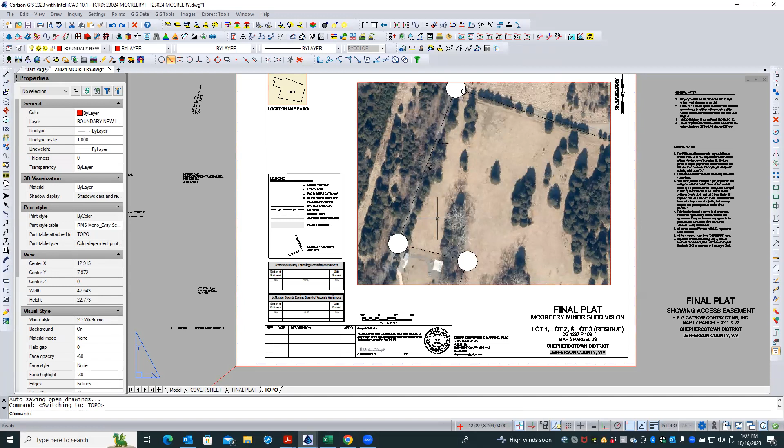Let me go ahead and turn off. Well, let me just for a second. Let me show you. There we go. Okay. This is the highway. I shot both edges of pavement, and I shot the center line, and then it drops off steeply to a bank on this side, and I took a shot along there, and then I came back for a couple hundred feet back here. I picked out a center line.

As you can tell from the rock outcrops, this is extremely rocky. Mm-hmm. And I picked out a center line avoiding rock as much as I could. But once he gets back here and he puts this right of way along this tree row, he's in for it, I'm afraid. Yeah. But in any case, I just wanted to have this photograph on long enough to show you what we're doing here, and then I can turn it off.

All right. Now, one thing to keep in mind, even though you picked out a potential center line and surveyed that, you don't necessarily have to do that, in the sense that if you can develop a continuous surface, then any center line you choose that lies over top of that surface, they'll be able to cut a profile from, as long as you've defined the surface underneath it. So no, I just picked a center line to avoid the rocks.

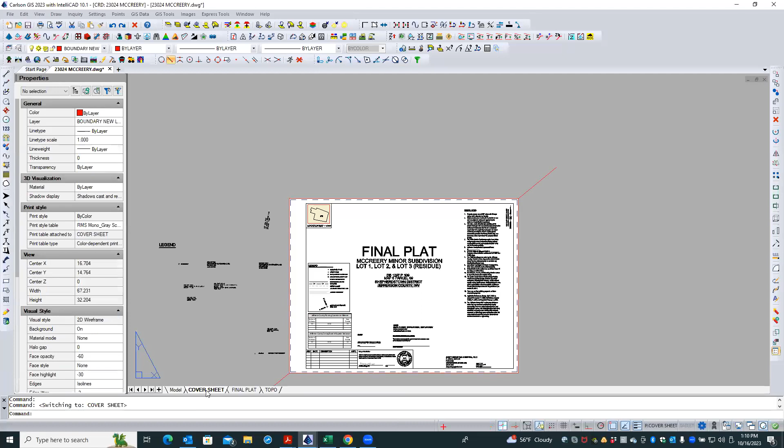Okay. So anyway, this drawing, because of the size, I went through and created a cover sheet, which I have almost complete, and I have a sheet called the final plat of the McCreery minor subdivision, which shows the first 3 lots, and then I have the topo, which will only be submitted to the engineer. He's going to do his own plan and profile to submit to the highway department. Right, okay.

And I picked out a couple of entrance points along here, and in the northerly direction, you can see forever. You can probably see for 1,000 feet, maybe 2,000 feet. Mm-hmm. In this direction, I picked where the sight limit is, and I've got to give him those distances from each one of these. But anyway, what I'd like to do this afternoon is similar to what we did the other day. And I don't know if I did this.

I don't have a scale here. I think I did this at 1 inch to 100 feet, which isn't a particularly good scale for topo. Oh, no, 1 inch to 50. Yeah, okay. And so that's not too bad, but because of the area that we have to do, I couldn't do a 1 to 20, I don't think. Right. Just because it wouldn't necessarily fit.

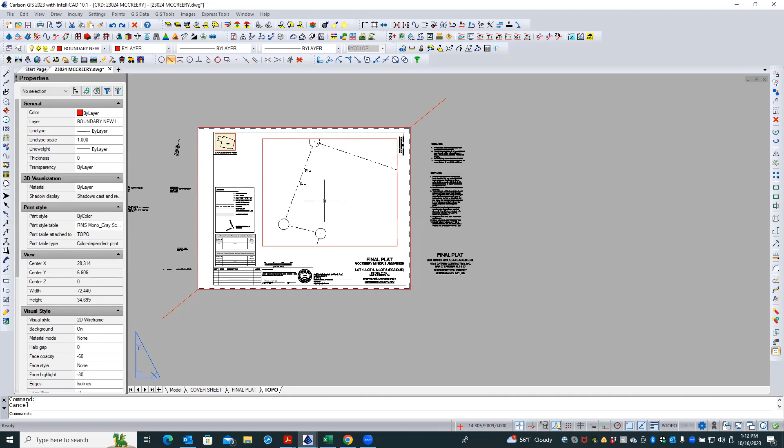And these things are huge, of course, and they don't need to be. I made them big when I did the original drawing to go out in the field and look for stuff so that I could see them. Mm-hmm. And no problem. You can change those at will. So anyway, what I'd like to do today is to generate the topo in here, and then to bring in the topo from the state site and do a comparison.

You can also, Michael, look at your comparison and see how it looks. If it looks good, you can do your topo, which is going to be that little chunk around that entrance geometry there. And then you can merge it into the surrounding LiDAR derived topo that comes from the state.

So you sort of tie in: you've got the detailed part, they'll have the rest of it, and then you can cut profiles across the whole site, across the whole state if you wanted. But at least that way the entrance down there is going to be much better defined than it will be from the flights. And that's what you're trying to deliver.

Okay, now I put all of the topo points on the 300 series. Everything from 300 up to 350 is a point for elevation. All right. So what about your spots? Will those also be? Yes. Okay, because that went up to like 390, I think. I thought I saw the number. Maybe.

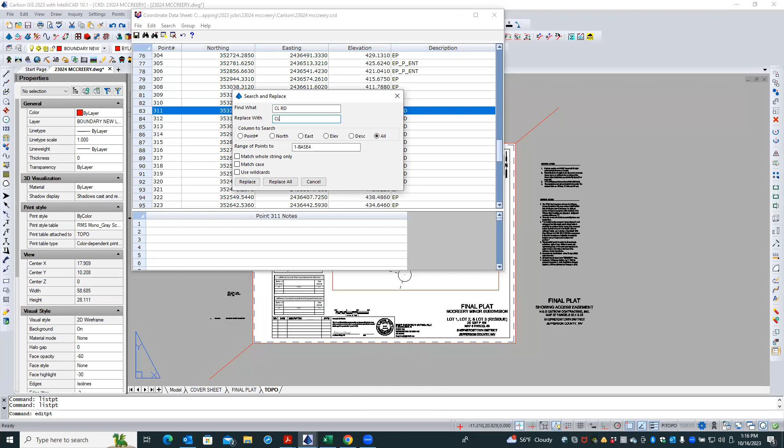Yeah, so go to the edit menu, or it might be under search. You look under search, do a replace. And you want to replace CL space RD, replace with CL. There you go, and replace all. Okay, now let's see what else we've got. Maybe a couple more EPs. There's toe and spot, I think.

All right, so your best entrance is that one. No, that's a 340. It still is an elevation. So yeah, I would just give that an underscore. There we go. And that looks like it. All right, so let's save. Excuse me, we'll exit that.

Now, let's go to your model tab because we don't really need to be over here in the viewport necessarily. Let's just go to the model. Let me double check a couple of variables here. I check these settings to make sure the drawing's at the right setting. Yeah, that's one of the things I was going to check anyway. So go ahead and do that.

All right, so you're at 400. Let's make that 50. Not 500. Oops. There you go. And hit okay. Okay, and now I'm going to look at a variable, MS scale. That is on, that's good. And that's good. Okie doke. All right, so we're ready to start doing our thing.

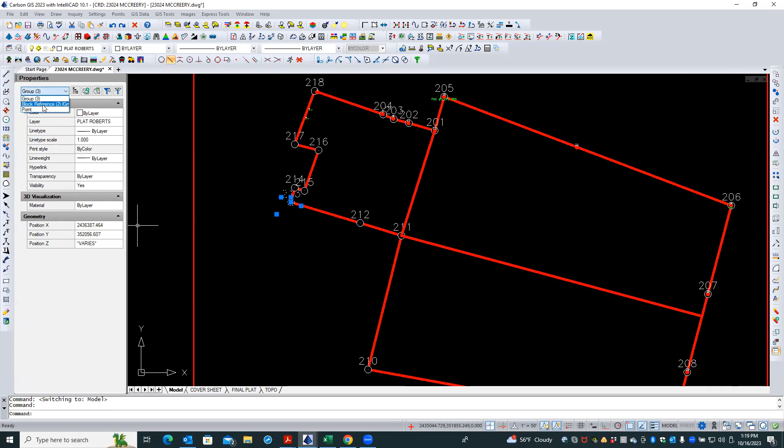Anyway, I don't know. Anyway, there's a command under settings called rescale drawing. And what this is going to do, it's going to ask this. Oh, it does ask the old horizontal scale, so I don't know what it was. Let's say, and I just resized those points so that I could see them. I just did it arbitrarily. Yeah, oh, okay. All right. Well, anyway, I'll let you take care of that if you want.

Are these all on the same layer like Plat Roberts, and Probably. Here's this one, which is on Boundary and Plat Roberts. That's okay. So let's freeze that layer for now, or those two layers. Uh-oh. Didn't want to do that one. I just want that. There we go.

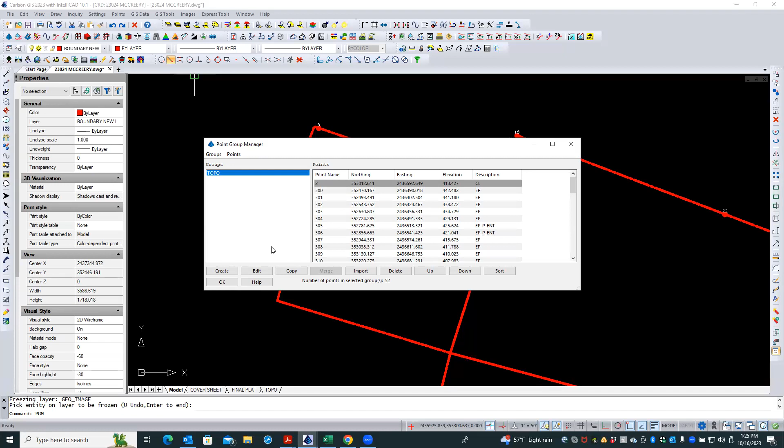It's going to be probably close to another. I was doing that when I started out with the boundary. Okay. But it should be a good elevation anyway. All right. So what we'll do is we'll see, and if it messes up any kind of thing, like you probably shot it before you shot the first center line point that you were picking up. Yes, it won't be in the right line.

Okay, so we're going to find that point and maybe we'll see if we can add it if it helps. If not, we'll exclude it. We'll be able to do that. Okay. So now we've got these points and we don't even really have to draw them. You can if you want to see them, but we can also do them through field to finish. So let's go to the survey module, and then let's go to the survey menu and choose field to finish.

There you go. All right. So it wants to know a field code definition file, which you do not have as yet. So we're going to say new. And we'll leave it here in settings so that we can get to it anytime with any other project if we want. Maybe we'll use it as a starting point for something else later. So it won't hurt. It's not going to go in our local job folder, but it'll be here in settings, and that's okay because we're going to name it McCreery.

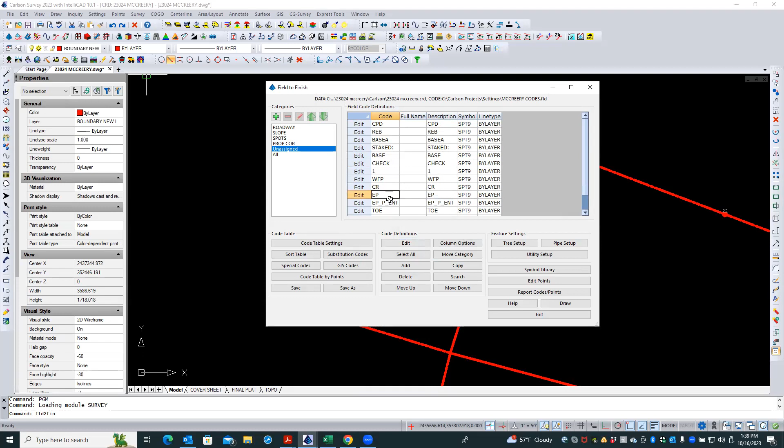All right, so I've got an iron pin, a concrete monument. So I'll now move those to property corner. All right, so we had the center lines. What is, here's some EP that go to roadway. We've got toe that goes to slope. And then we've got

spot, and your best entrance points, are those on the EP, on the edge of pavement? Two of them are, and one of them isn't. One of them's at the toe, I believe. Okay. I think. All right, so I'm gonna just put both of those under spot, I think. And again, this part doesn't really matter much.

Now, anything else in here, these are the ones that are left. See, I'm sitting here under unassigned on the left side. So these are the ones that have not been assigned. Do any of those make sense for any of those other categories? Yeah, the capped rebar. Oh, okay, that was rebar. Wooden fence post.

All right, so let's go up here and get this. Now I'm selecting and dragging with the mouse because I couldn't get the control click to do what I wanted it to. So I'm going to put those on property corner. So now there was one more you said. Wooden fence post, yeah, down at the bottom, those two at the bottom. Both of these. Yeah. Okay.

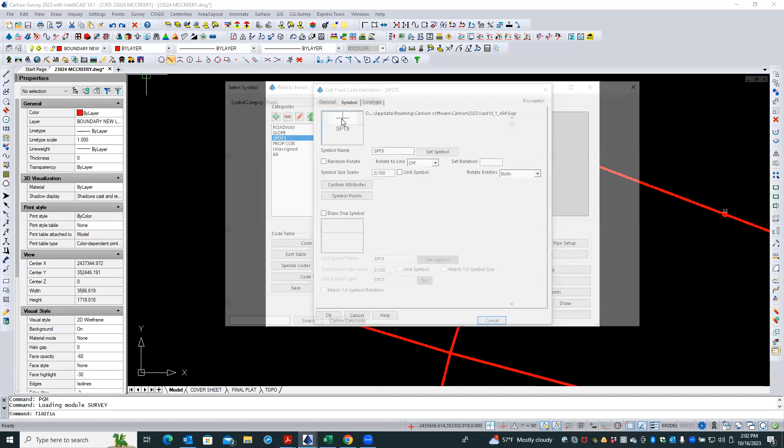And the symbol again will be that X, and you could have it separate. You can do a different one, say for a particular code. And so let's change this attribute to, I think it's that one that gives that little angled up elevation. And let's make that as points only. There. Description, none. I don't want to see the description. I'll just take it as a spot elevation, and we'll say okay.

Best entrance. That was kind of like a spot that's labeled as best entrance. Yeah, and so this would be basically just sort of a random shot. So we'll leave the symbol. We'll leave it to go on its own. Let's put it on V-site-miscellaneous, something like that. All right. And we won't put it on a different point layer. We'll do the points only. We'll do it 2, and we'll make that. And so we'll see what happens with that.

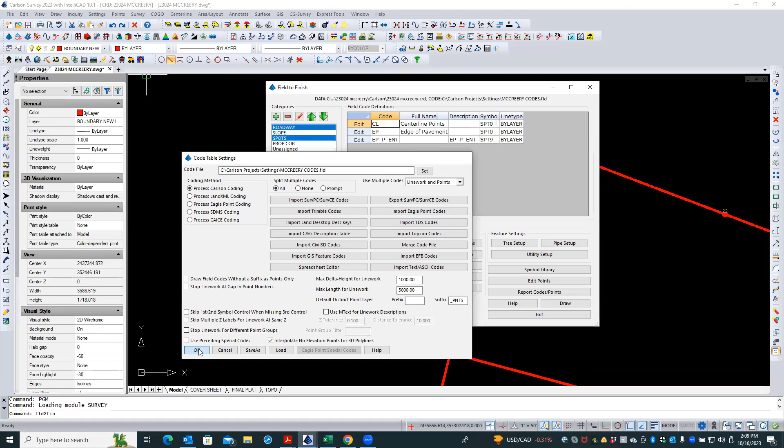All right, so all of these by default we'll leave set to this, and we'll call that okay. And now the last thing I want you to look at is in these code tables, what we call special codes. And these are codes that go after your code.

Like you're going to shoot a point, you're going to call it a CL, and then you're going to put a space, and you're going to put one of these codes in there, once you're used to surveying by field to finish. And so you would say, okay, my CL is the description. So that's going to automatically start doing things like my code says. But within all of these CLs, I can put a space BEG. This is going to begin a new centerline line.

And I may have other CL points, but if I see a CL space BEG, that means stop what you were doing on the old CLs and now start a new centerline line. Same thing with an end. It's a good habit to get into when you first start doing this work that you always identify the first shot in a feature and the last shot, so you know where it starts and stops.

And then there's the PC and PTs. Those are the two most important codes that you're going to see, and that's these next ones down. That's where you start a curve and end a curve. So PC and PT, and they can be anything you want. You could put SC and EC, it doesn't matter. You could put 7 and -7. None of that stuff matters, just as long as you're consistent. But there's a couple you want to be familiar with: begin and end, PC and PT.

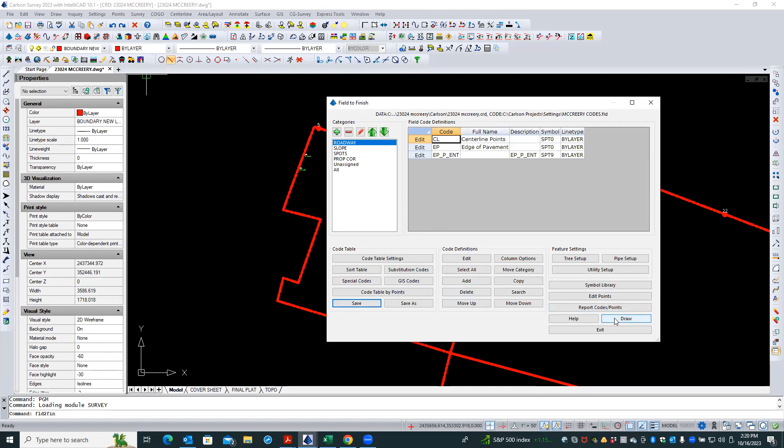Okay. And again, we'll see how that part is going to work. Once we see where the points lie, we're going to get a really good sense of how this is going to work, because this will be a multi-pass thing until we get it resolved and refined. So we're going to say draw, and it's going to come to this. And this is what normally shows up if you have a code already; when you go into this command, this comes up first. You don't go into building a table from your points, etc.

But you see that it already knows what coordinate file, it knows now what code table. If I were doing GIS tracking, I would have a separate file for that as well, but I don't. And now my range of points, and again, you could say all, but then it would start drawing all of those other non-coded points, like these property corners and everything else in that list of points. Or because we made that topo group, we're only going to draw the topo group. These other points are going to stay as they are.

And we'll tell it all of the different things we want to draw. In this case, we'll take them all, and you can filter or restrict your drawing range. And we do want to say erase any existing Field to Finish entities, because once we draw it once, we see, oh, I got a problem. I'm going to fix that, and I'm going to reprocess. It will take care of erasing those and recreating those. And so that's what we're going to want.

But now, the one big thing we want to look at here, and generally it's just to match your surveying style, is these additional draw options. And there's all kinds of different controls and things. I'm not going to worry about those, but I do want to do this. I want to locate line work and points on my real Z axis.

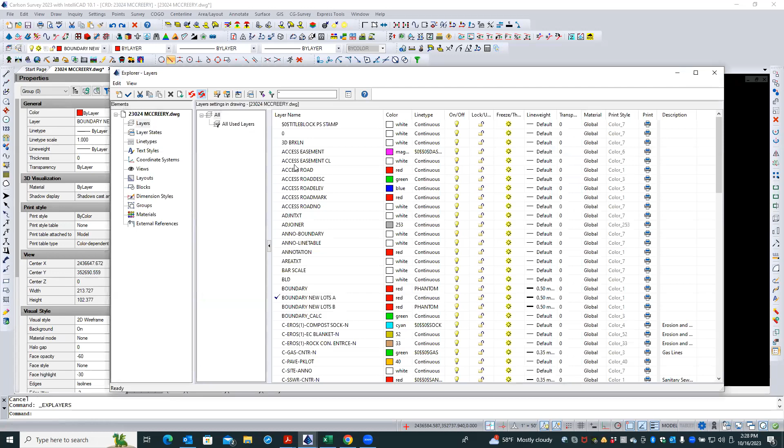I've got some elevation layers here, but it's so dark on the screen. I'm just going to change their color so I can see them. And I want to make my 3D break line magenta just so I can tell. All right, so now you see all of our lines. Looks like it's drawn lines between all these points, some possibly correct, some possibly not. And looks like they're all the same. It's all purple, the magenta color.

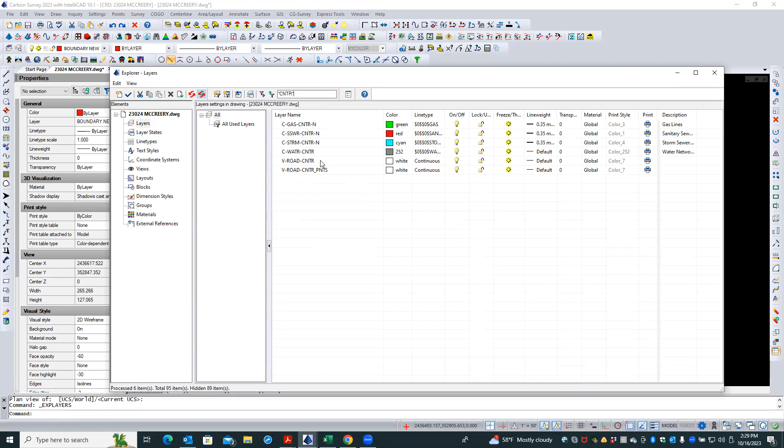But remember, we said all 3D and 2D. So if I look at this, I'm going to just hold the shift key and spin it up a little bit. You see what it did? The 2D ones are down below. And there now is that one. So I'm going to go back to plan view. And there is that. Now, I've got those edge of pavement and center lines. I wanted to take that V road center line, and I'm going to make it a center 2 line type so you can see that one show up. All right. So that's what we have to start to work with.

Now I can look at this and see, for instance, there's the toe slope, right? So that looks to be nicely defined, and there's nothing else that needs to tie to. These points here, notice, this is a point, but remember I turned the symbol off and the description off. So really all you got is that little itty bitty point. So if I want to look at that point, I'm going to double click one of the attributes, so it brings it up. So there is a centerline point.

There's the CL, and it's connected to the previous CL, which was 341. Now this one is also connected to this one over here, which was what, 321? Oh, no, not 321, but 320. Yeah, 320 is a CL. So it went 319, 320, and then the next centerline point went from 320 up to 341. Now, remember what you just learned on these processing codes, like begin and end. What would you think might be a way to keep this line here from happening? Put an end on the one up at the...

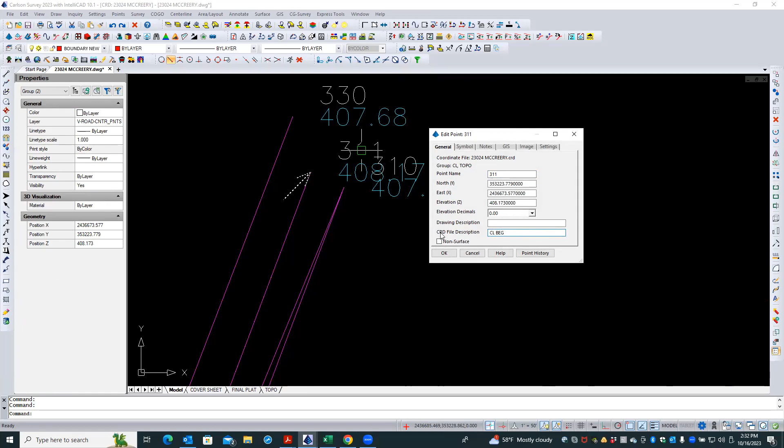Yeah, exactly right. And just for form's sake, I would also put the begin on the one up here. So this 311, is that the first one you shot, the center line? Probably. So I would put a space, BEG, and I'm putting it in the coordinate file description. And then when we reprocess that, it will read that accordingly. I'll come down here now and take my 320, and I'll put the END.

Now, again, if you're doing this out in the field, once you're used to doing this, you're going to know when you do that, and you're going to type on your data collector CL space END, or choose the button that represents ending a feature line. Were those center line points? They were, weren't they? Okay, then 319, 320, those are center lines. Yeah, see right there. Okay. Now, what's over here, 300? That's an EP. 300 would be EP.

Okay. Now here's 321 as an EP, but you notice it goes up to... well, you had 322, 321, 22, 23. But see, this line over here looks like one of those straight closing lines, like this one was for the center line. So we would take a look at, see, there's one, that EP referred entrance.

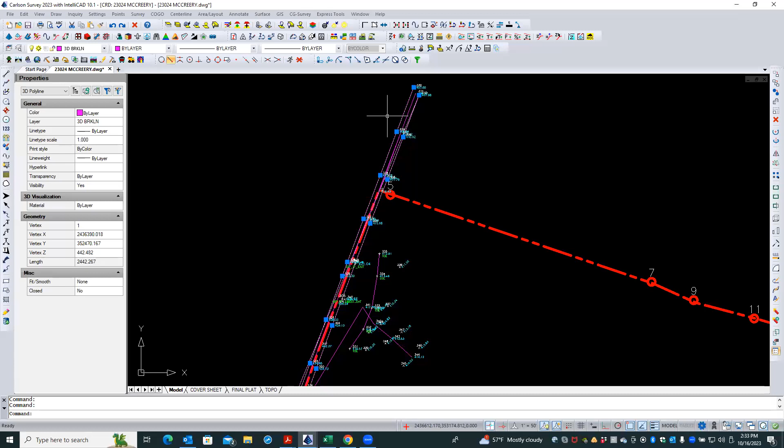So let's see if we can gather a couple of things to figure out here in terms of where we're going to start and stop. So let's go back, instead of trying to do this just piece at a time. Let's go back to survey, draw field to finish, and this time let's edit the codes. We're going to leave the codes alone, but while we're in the codes over here on this side, I've got access to this edit points.

Now, here's where you're going to be able to use your knowledge of what happened out there in the field and whether or not we need to change any of these codes. So you know that you started down here at 300 as your first sort of forward, except you had this one point number 2. That's fine. So I don't know where that is in our sequence, but that's going to try to draw from 2 to wherever our first, here it is, our 311, except we put a begin in there. So 2 is no longer connected to that one.

That actually, I guess, should, oh no, okay, yeah. So the one above it, the 310, should be an end. Yeah, for the edge of pavement, but for the center line right now, does point number two go to this point and then the next one? Where I need is, where is point two in our list of points? Do you remember? Point two is up at the start? Yeah, it's up there. It's right in the center of the road across from the property line that comes in. Okay, so it would be the furthest center line point.

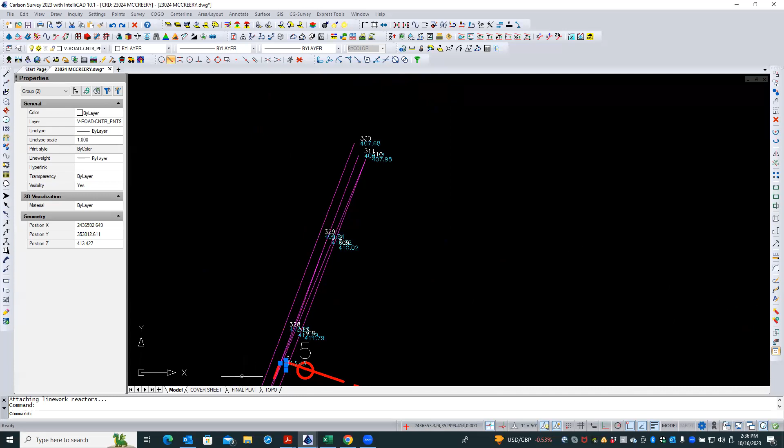No, I think I shot past the property. Okay, I see. All right, so let me close this and exit this for just a second and cancel. All right, so let's go up here and find. So there's your point there. Okay, so right now it's a center line point, and when it processed, it went from here down to 311 to 12 to 13. But you've also got here's 12. So it went from 2 to 311 to 12 to 13. So it's doing that, looks double, like two needs to be eliminated then maybe.

Yeah, well, except you can do one of two things. You can give it a different code, or you can take it out of our topo group. Except I really want to use the elevation it provides. That part's okay. So let's just say we'll keep it a center line, and we'll call it center line, say, opposite property corner, something like that. It is a center line point, or here's another something to consider. Maybe this is an even better approach.

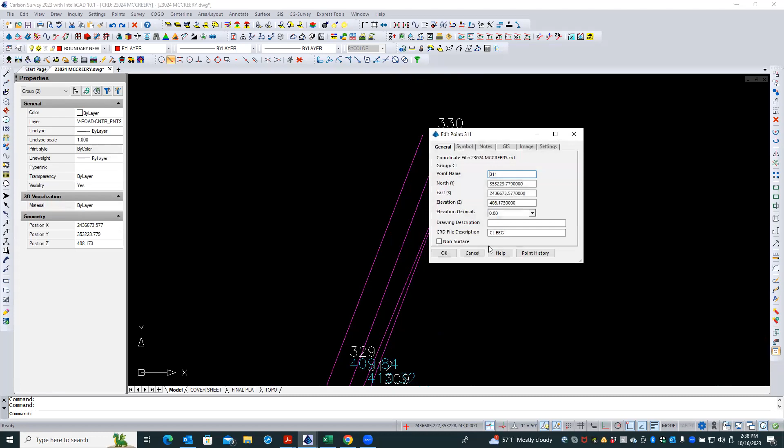Point number two jumps up to 311, then goes to 312, and then to 313, and then 314. So point number two, if we were doing those in order, would be between 313 and 314. What about if we did this? If we changed the number to 313A. Yes. And so now 311 is going to begin the center lines, and that should say BEG, and it's going to go to 12 to 13, and then to 313A, and then to 314. Okay, so you see what I did there.

And if I'd had these as like 300, 305, 310, 315, then I'd have empty gaps, but I didn't have any, but I can use letters to make point numbers behave correctly there. All right, so I think we've taken care of that one. Although you need to remember that you've now changed the number of point number two.

So if we go back to our field to finish, we edit the codes and now edit the points. See, point number two is no longer there. We're going to come down here and find a 313A. I'm actually going to come down here in my notes part, and I'm going to say changed to 313A, old point number two. All right, just for documentation. Okay. Oh, it looks like it puts.

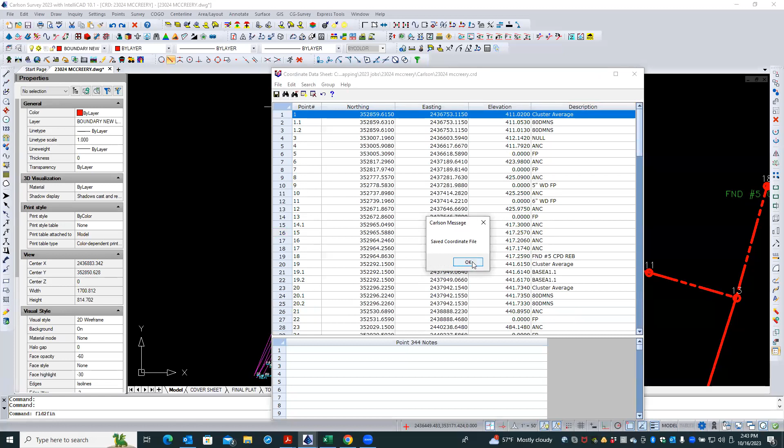And that's basically it. We'll hit the little save icon, the picture of the diskette, which nobody under 35 remembers what a diskette is. And so that's done. We save. And now we just hit the old exit button here and choose OK. And it's going to erase all the other stuff and redraw it. And so now you see that line is gone. All of these double back lines are gone.

We connected those. Now, the other possible question you might have had was that when you had this before and you had this extra line drawn in here, why can't you just do something like erase polyline segment and get rid of that? Well, the answer is you can. If your field to finish produces something that you need to just edit, you can certainly do that. There's not a thing wrong with it. It's just this way, once you know how to fix these and what the coding should have been in the field, then you can take care of doing that by code.

But if you just did it that way and then you went back and reran it, it would put it back, right? Exactly right. Good. I wanted to make sure you would pick up on that, and you did. And that's exactly why you do it. It's the same thing about when I teach people how to edit surfaces. Everybody wants to go through and start editing triangles if they got a problem. And I'm saying, you could do that, but what happens if you have to recreate the surface? Now you got to remember which triangles you've edited and go back and redo those edits. Why don't you fix what caused the triangle to need to be edited in the first place? Then you don't have to worry about it.

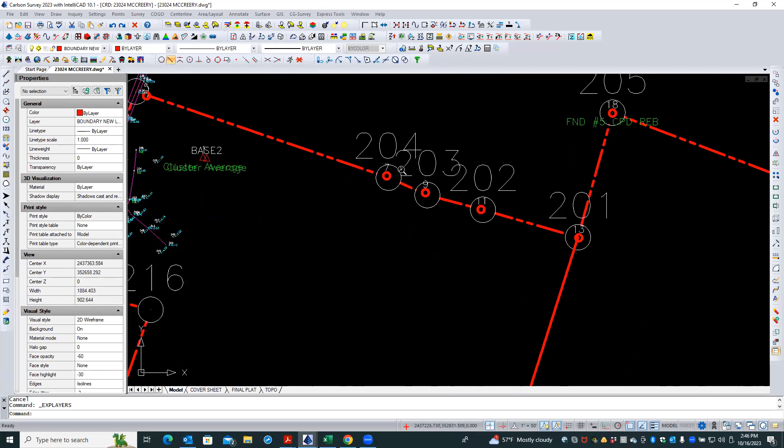But my question is, are these points actually points that were shot on the ground, and therefore their elevations are good, or no? No, those are, except it's not 204, it's 7. It's not 203, it's 9. It's not 201, it's 11, 13, etc. The ones on the other side I haven't gotten to yet. Okay. So what I'm saying is that these are points.

So let's take a look at what we have. I'll just grab some of these things. Maybe I'll grab this one too. Oh heck, let's get those. Okay, we'll get them all. Then there's another control point, the green one there, right there. Yeah, I think I'd already grabbed it. Yeah, there it is.

All right, so now if I look at this in my 3D viewer, here's what I have. And I can ignore zeros or not. So apparently this boundary line is drawn at some elevation. It's probably flat, but it is non-zero, apparently, because it's still showing up. And I see a couple of things here. I've got a point down in here and a point here. I'm not worried about trying to resolve that. I'm just showing you that there's several things you can do.

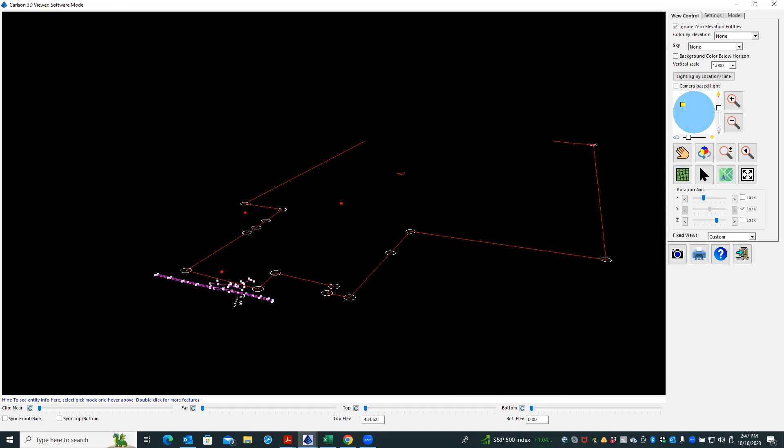You can use these points that are out here that you've created as part of your terrain model, as long as they were done on the ground. But now look at this right here. You see how those boundary points are up in the air over the ground points? Well, that's probably a good indication that we should not use those points to help us model the terrain. It also should be something that we want to make sure we know why they have a different elevation. And it could just be arbitrary.

I'm going to exit that now and come back and just take a look at this, because it is 2D and it is an elevation of 484.62. That's probably the elevation of one of these particular points. It could be when you started to draw that line, you snapped into that elevation as its starting elevation, which is one of the choices right here, to set the elevation by the first point when you're drawing line work. So anyway, you can resolve all that independently. It looks like those points are not going to be ones we want to be using.

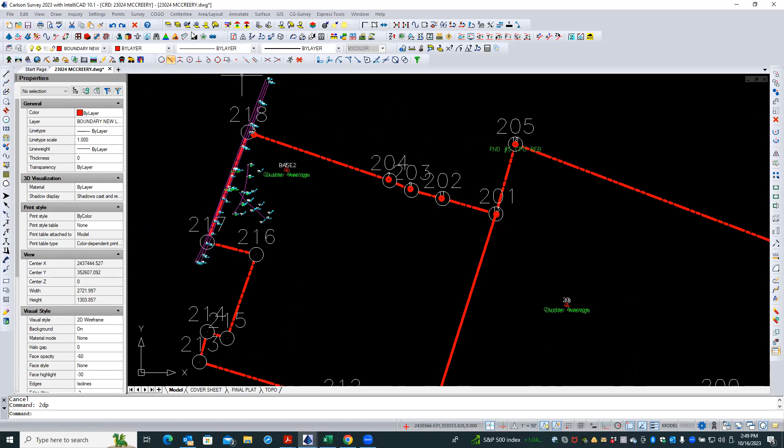And now one thing you can look at right away, what do you see there? Got a center line crossing over to the edge of pavement. Oh, it doesn't cross. It's just sticking up in the air. So it could have a bad elevation for whatever reason. So linearly, it's okay. It's just got a potentially bad elevation. Yeah, I would say it is a bad elevation.

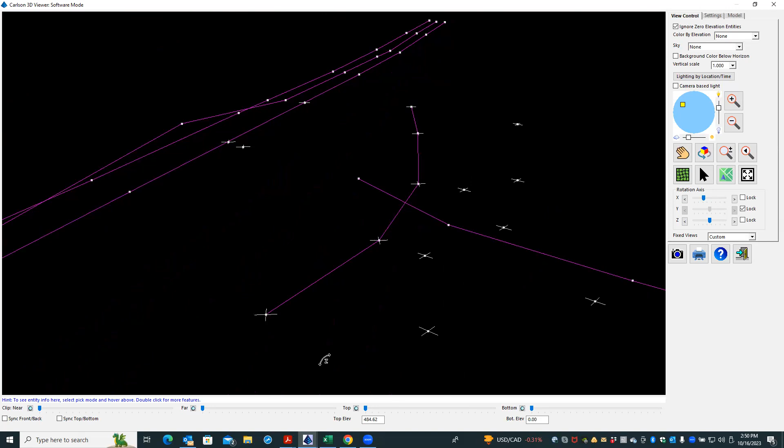And then you could go back. Oh, I didn't mark which one it was. Let's see if I can find it here. So it's that one, right? There, I'm just going to draw. Straight point. Boy, I wish they could get that resolved. But anyway, all right. So I drew this little marker in 3D space as to which point it was.

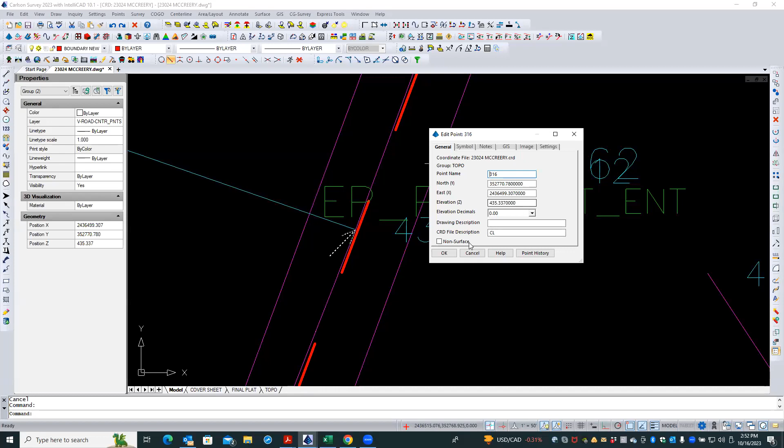And if I look at that, well, that's the EP for the best entrance, but the point that is here, I've got EP best entrance, EP P ENT, so proposed entrance. So those are individual points. This would be, that's my center line point. So 435, 337.

So a couple of things we can do with that: we can mark that point to not be used for elevation, in which case it's going to just interpolate from the previous to the next one beyond. Or if you went back and edited your raw file and said, oh, I forgot to adjust the HI, you can recompute all that. But I'm guessing that information is possibly lost to us. It's not lost, but I didn't change the HI, so there's something wrong with that point. It's a bad shot for some reason.

It's pretty significantly off too. Pardon? It's pretty far off too, looks like. In height, you mean? Yeah. Because this one looks like 10 feet off. There's 25 to 35 and then back down to 28, 29. So my guess is it could be 425, 34, but we don't know that. So here's one at 423 to 428. So calling that 425 would probably be okay. However, you didn't edit the point for any reason.

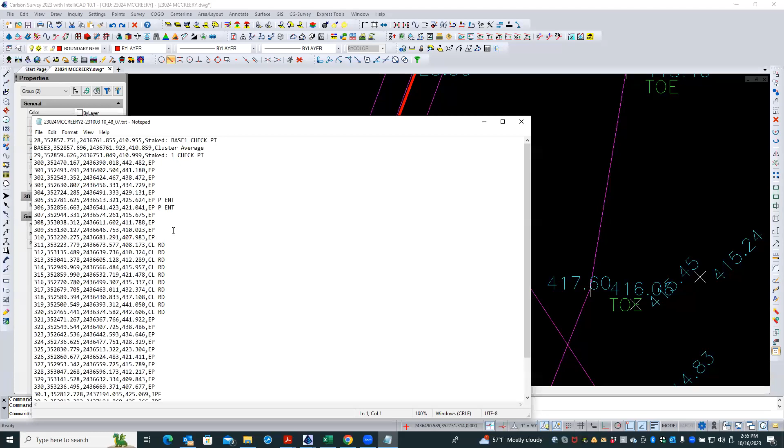Let me go back here real quick. Yeah. Just double click the 435.34 number. Yeah, just double click that. It'll tell us 316. So the 316, there's something wrong there. So that's from 21 to 35 to 32 to 37 to 41. So let me look at another thing here.

So you don't have the raw file, do you? Oh, I see. Yeah, so what's it again? 316. It looked like your three before it are flagged red for whatever that means, and then 16. Huh, well, 316 passed the confidence test or whatever that's looking at. Yeah, but clearly there's something wrong with it. That makes me a little nervous.

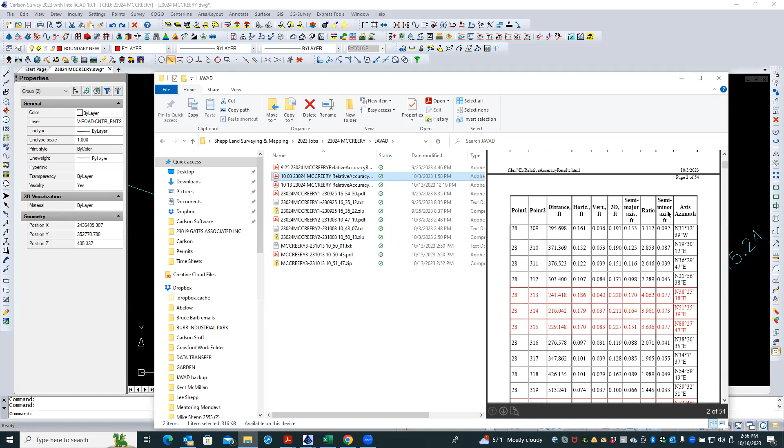Well, the 313, 14, and 15 show up as having failed, or they show up red. I don't know what your reports are indicating. All that means is that the horizontal distance was greater than... I mean, is it back computing something that it's comparing it to? So that's the spread there. So your horizontal looks okay. Anyway, I would say we probably just need to eliminate that point from the model.

Yeah, so we can do that a number of ways. So if you double click that point again, that 435.34, right in the lower left where it says non-surface, click and say okay. Now we've taken care of the point, but we need to resolve this vertex right there. That vertex needs to go away out of the 3D. Okay, so now the point is still there, but instead of that being raised up like that, I want to get it to pop down.

So you can do that a number of different ways. You can edit the actual, well, you can't because you don't have the civil tools, but you can do it this way. You can take out the vertex itself and it will connect the previous to the forward. But what happens there is that if there's any deviation horizontally, you're going to miss that deviation. So what you really want to do is, instead of taking this vertex out completely, you want to use its horizontal location, but take out the influence of its vertical position. So let me see if I can figure out how to do that with survey.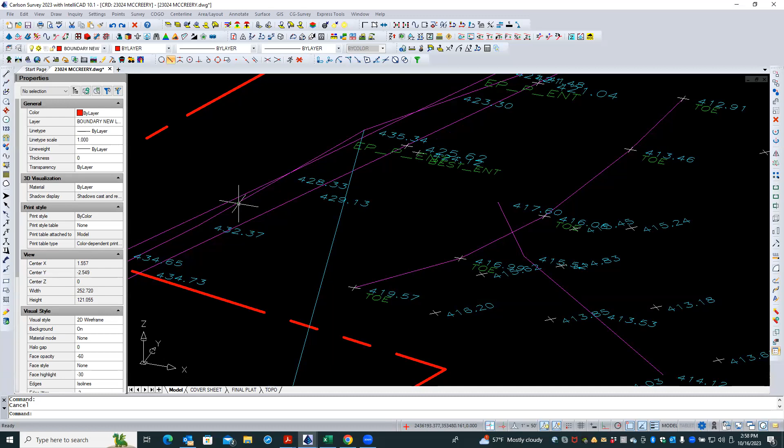In civil, that's easy enough with the center line, with the polyline editor. But what do we want to do with it here? Let me go back to my plan view so we're not so turned around, and let me isolate this.

All right, so what I want to do is make sure that I keep this elevation, 21 to 32, and if I take this elevation out of contention, that's going to be 21, so that's going to be like 26 or 25 or 6. That's about what it looked like on the edge of pavement. That'll fix it. But I don't want to just get rid of the vertex entirely, because this point might not be exactly on the same line. In fact, let's just.

Gonna go from there to there. Yeah, there we go. So I've now drawn there. There's the line that goes. What was this? All right, so here's our line that goes through our point. Here's the line that goes just from there to there. Okay. So the elevation of this point right here is what I want this elevation to be, because I want to use that a bit.

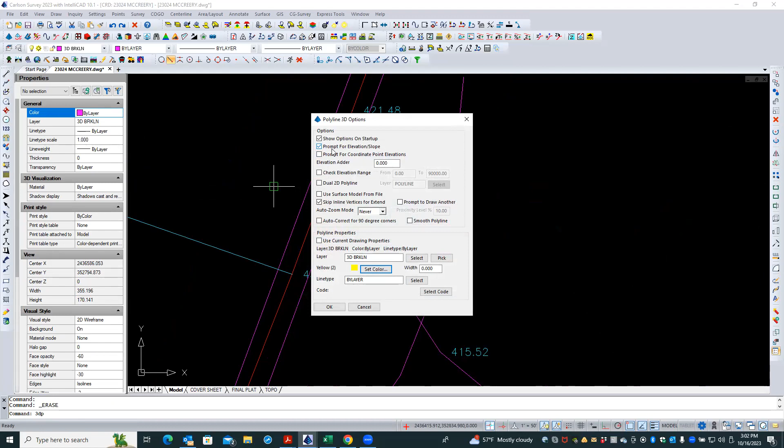So we're going to draw a 3D polyline. And I'm going to make it yellow just for sake. So now we're going to make sure up here in the top that we're going to prompt for the elevation and slope. And we're going to say, okay. And now we're going to go from this point. Notice how this pops up here because I turned on my point object snapping under settings. Okay, but that's what I want.

So I'm going to go from this point. It prompts me down here below, 421.4780. I'm going to accept that by hitting enter. And then it wants to know the next point. Well, I'm going to go to this point here. And it's going to also suggest that same elevation of that point, 435.337. But I don't want to use it. So I'm going to type I to interpolate. So it's going to use the horizontal, and you see this point elevation will be interpolated upon completion. That's what it says down on the command line.

And so now I'm going to go to this point, click it, and I'm going to say E for elevation. Oh, hush, Siri. So it's going to now go back to reading the elevation, that 432.374, and I'm going to hit enter to finish that. And I'll hit enter one more time to finish my line. So now I have this 3D polyline.

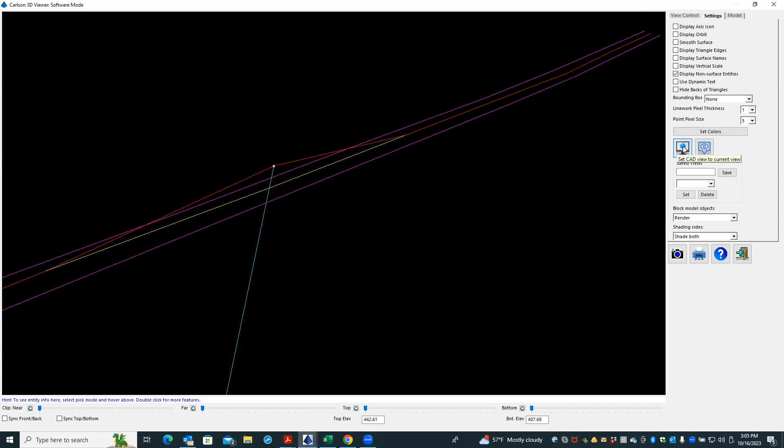Now I'm going to position this viewer. I'm going to push it up like this, and then spin it around a little bit so I can see the difference. That is pretty illustrative of what I want to do, because I want to take that out and match the vertex that's down below it. So this viewpoint is what I like. I'm going to go to my settings tab and choose this button in the middle that says set the CAD view to the current view. So I'll click that, say okay, and then exit, and it's going to put me in that view.

The reason I have to do this rotated is if I try to do this in plan view and move grips around, it snaps them down to 0 for whatever reason. So I'm going to select each of these 2 lines so that the grips are visible. In fact, I'm going to talk you through it. I want you to get used to the mechanics of it. So select the red line and then the yellow line, because you want your grips to be visible.

Now you're going to take your mouse and hover into that one right there. And now that it's snapped, just click your left mouse button and move it down into the grip below it until it snaps. Click.

And now you can escape and press, because now you can select the yellow one and also that little cyan one that we drew off to the side, that one, and just delete them both. You no longer need them.

Now your point, that 435.34, you see it's sitting up there above it, and that's okay. And we've marked it to be a non-surface point, and I'm not going to change that point. I'm not going to move the point down. We moved the line work. But remember, if you go back and reprocess field to finish, you would have to resolve this again, or you would have to somehow ignore that point to keep that from happening. But I think we're in good shape.

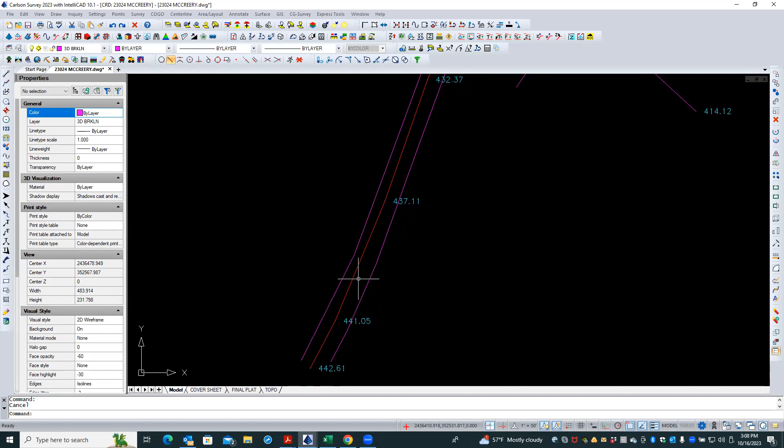And really, though, Michael, it doesn't really matter, because even if we decide later on that we want to draw it as going through this middle point, when we draw the lines, we can fix all that if we have to draw that separately. But what we're doing with this is that it's break line geometry. It's going to keep points from this side from looking across to points from this side and making a triangle like that. So now the triangles cannot form across here. They can only go up to the points along the center line. Okay. So those will be okay.

Now it will shift the crown a little bit over to the side here, but I think if we resolve this, bring this back over, see, that's getting down toward the corner of our property. I think you'll be okay with that. All right. So now there is, however, one thing that we do need to fix. And that's this right here. Because we have a break line with the toe of the slope crossing this break line, which is the center line, that possible center line that you've created. Okay.

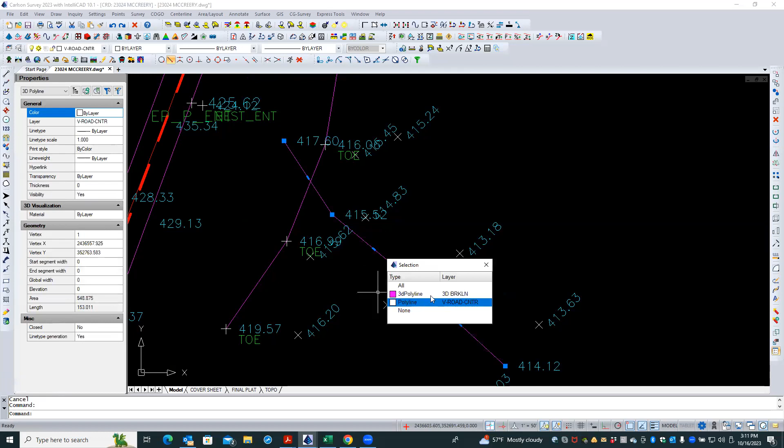So this line here, even though we called those center line points, doesn't really need to be a break line unless we're trying to keep points from over here, say this spot shot, from looking over here and seeing this point to form a triangle. Yeah, no, I'm not trying to do that. Yeah, exactly. So a center line, that's the best alignment. So what I would say to do is we'll keep those as CL points, but the only thing I need to do is to simply select that 3D break line and get rid of it.

And so now you can see the line style. That is a potential centerline plot, but when I model this surface, all these different points are going to be used together. And it's not going to restrict the triangulation. It's going to let them form triangles wherever they need to. Okay. But with this toe of slope, and this is an important thing, it keeps points like this and this and this from looking across and jumping up here to form triangles up in the air, because they clearly don't.

They have to come to the toe of the slope first and then come up. So that part's well modeled. Excuse me. That portion of this is well modeled and well represented, and it's doing exactly what it needs to be doing. Okay.

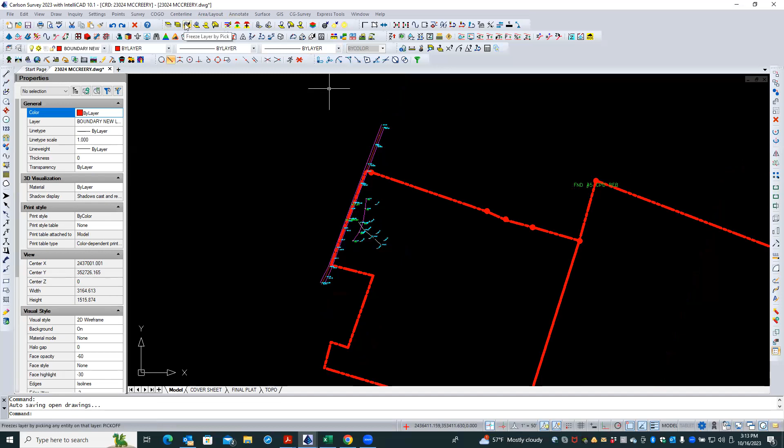So with that in mind, we can now build this triangulation. Now, what's going to happen though is if we were to triangulate our data, we're going to get a potentially limited, let me set my layer, and then I'll freeze off that. So the surface that we're going to get is going to basically look like this.

If we were to draw a shrink wrap, cross gaps, topo, that should be fine. And let's take a look at what happens here. Okay, so that was that one. Let's do that again. I think we're going to find that we need to go back to median. Yeah.

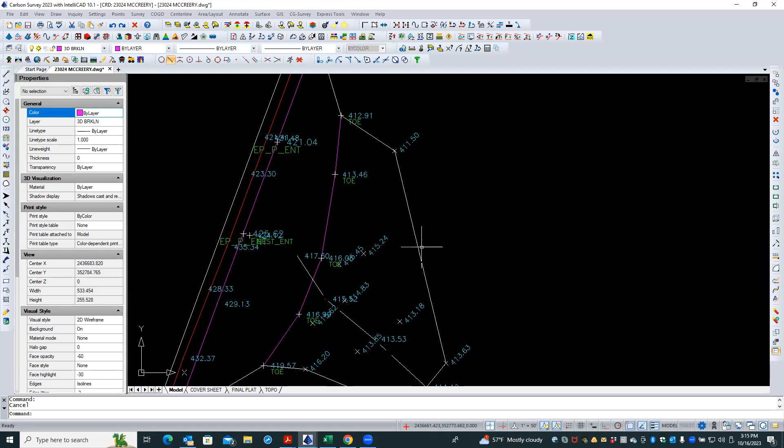All right, so that's really the extent of the surface information that we can glean from what you have surveyed. And even this is being a little bit generous, I'm allowing it to fill in the gaps in here, saying that it goes from this point at 411.50 up to 413.63 without any severe jolts. And I think that's probably fair. We'll be able to bring in the state's topo and look at it for comparison. That's exactly right.

So at this point, then we can create that, and that's a boundary topo, just so I can keep track of things visually. So that's the boundary, and I've got the break lines. Now the boundary is 2D and it's at 0, so it's not going to cause any problems. So let's go ahead and build a surface out there. Well, first of all, let's save our drawing. It would be a shame to lose all that.

Let's take a view of this in our 3D viewer one more time, just to make sure everything is in good shape. This is our drawing viewer at this point. Just select the window around it all, and hit enter. When this comes up, you can maximize that window by double clicking the title bar. Okay, now there you go. Click the mouse and push up, and then go back and grab another piece. There it goes.

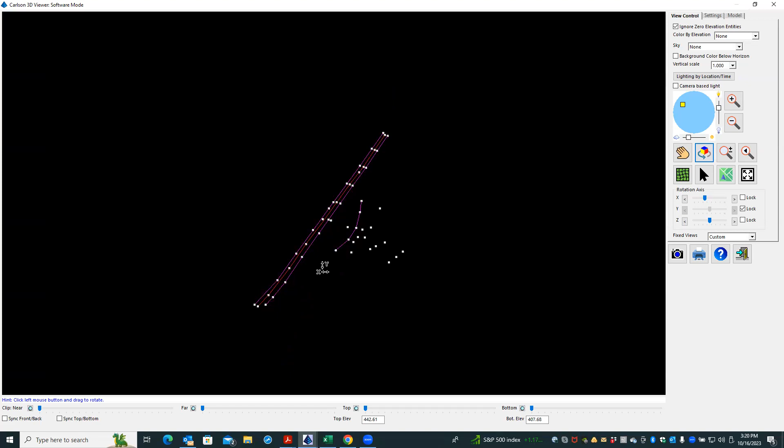You want to go back over the central part of the data, so it says XY only, and you're going to go down toward the bottom, but not so much that you switch. Now click and hold the mouse button, and you're going to just push it up. You're going to try to raise your garage door up into your house, okay? And you want to keep pushing it, and then if you have to let it go and go back and get another bite of it, you can do that, and just push it to right about, keep going just a little, right there, right in there. You want to be mostly oblique.

Now let the mouse button up, and put it down at the bottom edge to where now you can click and hold the mouse button and go left and right, and you can spin it around. Okay. So you line it up and get to where you want to look at something, and then wherever it's all lined up, you point to it with the mouse. Yeah, and now let's say, look at the center line of the road. Now let the mouse button up and just point to it and roll the wheel. Okay, and now you can also press and hold the wheel and pan, and you do little tweaks to fine tune things and all of that kind of stuff.

All right, so that's what we've got, and we're looking over there at the toe slope and the sort of random points behind it, and toward the road and away from the road, all those other spot shots that you took, and everything looks okay. I don't see any extreme outliers. I see a couple of points up here, like there's one right in here that's the one that we fixed, remember? Yeah. So it shows up here in the viewer simply because it has elevation, but we've told it to be non-surface. So that point should not be included when we model the surface.

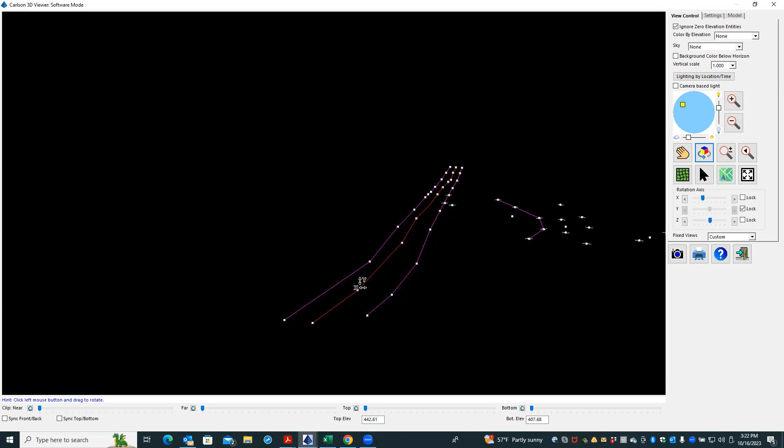So you get an idea, and here's a spot that has a little dip in the center line. And that's probably truly the case. And again, like you said, maybe you should have picked up an extra point in here in the center for this center line to be a little bit more merged between these two edges. But you'll learn to refine that as you start doing this more and more.

Oh, and there's that 313A. Remember, that's where the property line comes down and hits. Right. Which you sort of shot in the center. And here's another example: if that's the center and this is the edge of pavement, well, you sort of missed the center. But again, those kind of things aren't going to make much difference at all in our modeling. They're just serving as break lines. And if you later need to make a map and draw the center line, you can decide to scoot that little vertex over to visually line up in the middle. Once you're drawing 2D line work, that's not going to affect anything.

All right, so we've now verified that everything looks okay. We saw our strange point, but we've marked it. So let's exit the viewer. Yes, either that or the little house down below, either one. And now we can actually make a surface, and then we're going to compare that with the other information. And if it works out favorably, we're just going to merge this into all that additional data. Okay, so Surface, yep, Triangulate and Contour. Yes, sir. And now we've got 4 tabs that we need to look at.

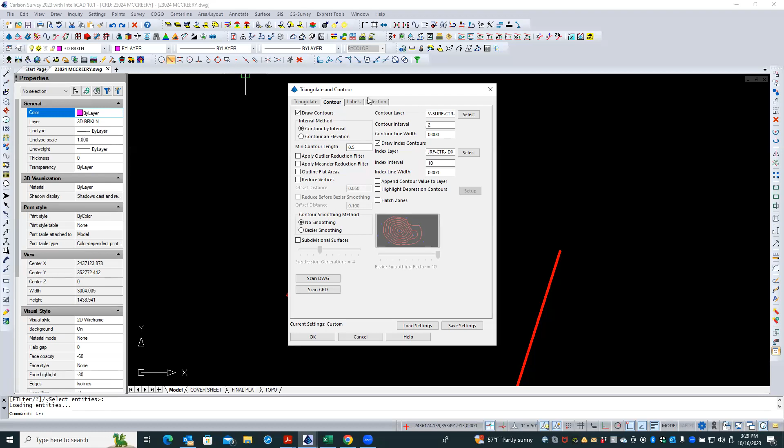And let's change that label layer. Again, at this point, I would just paste it, right click, paste. And then change that INT to be IDX. And now put dash TEXT or LBL or something like that. There you go. And now select that whole thing right to left. No, go back where you were. You're right there. Select it all, right click copy. And now again, right there, right click paste.

There we go. So now, if we were to label the index contours, if you wanted them on a separate layer, right now it's all going to go on this IDX layer because we're only going to label the index contours. So that's fine. So now let's set our text size scalar; it's at 0.08. That's fine.

And we want to make sure that we label, and the checkboxes down below in the middle portion there, we want to label the index contours only. That's already on. And we want to hide the drawing under the labels. That's done. We want to align the text with the contour. That's done. We want to draw on the real z-axis. That's done. And that's really all we need to do there.

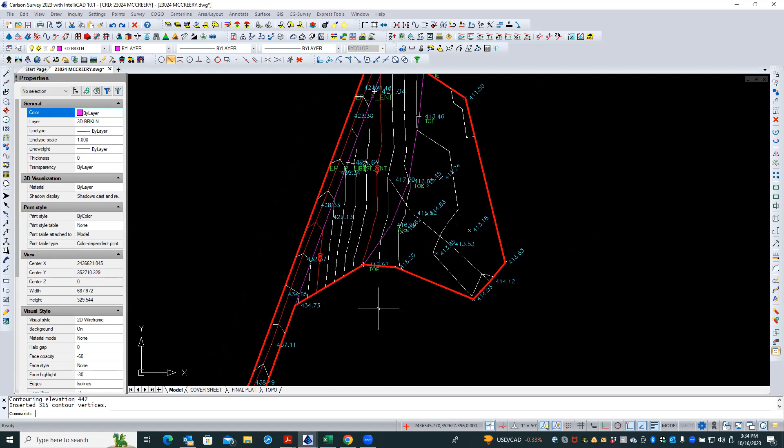And then there's a little bit of weirdness out toward the end of things, but let's compare it to the other surface information that we're going to get. So we're going to save our drawing. And let's bring those contours in from the state and see how they compare. Let's see, was that on tools? No, it was on the data. GIS data. There you go. Import GIS data? Yeah, I think that's what we've got, right? And we'll take that from the shape file, the Esri shape file.

And by the way, we've been going at this for a good long while. So if you need to take a break or whatever, let me know and we'll come back up. But I'm gonna have to leave sometime. I have another Zoom meeting. I've got to go on the Society's Budget and Audit Committee, yep, okay, which I'm the chairman. Yeah, it'd be important to be there for that.

CAD Resources, is that where it was? No, I don't think so. WVGIS data all the way down. There we go. Okay, open one more folder. There we go. Now, you're down at the bottom through index, I think. Yeah, we need to get the index first. Oh, okay, that's Berkeley County. Just go back up at the top. You see at the right up here at the top of this list, that's Berkeley County. Oh, yeah. So it's Jefferson County. And now you can just drag down, grab that.

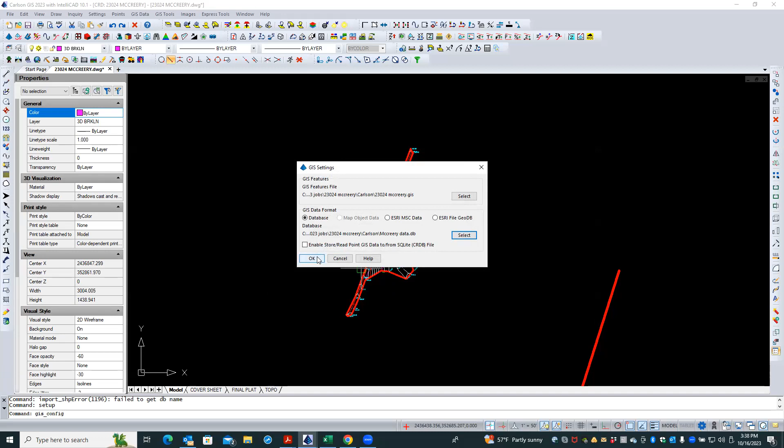All right, so let's go back and do that one more time for the index. Import GIS data shapefile. Select our file. Just scroll all the way down to the bottom, and you can, yeah, okay.

Now, let me think about something here. Let's see. I should be okay. All right, so say okay. Now, go ahead and check that first box, although it's not going to have any bearing on us, I don't think, and choose import polylines. Imported 296 closed polylines. Aha. So there we are.

And the one that we're smack in the middle of, we need to know what tile that is. All right. Now, where is the rest of? All right, so we need potentially these 4 tiles. Yeah. So let's find out what those are. So what we want to do is we want to go to the GIS data menu, and we're going to do the GIS inspector. So we're going to have it float what it is we want to see.

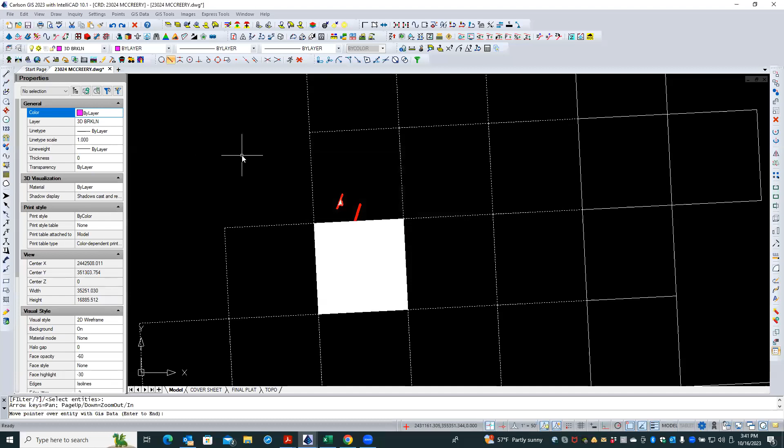And the thing that we need, what was it called? The USNG name? No, it was either that or the zone. Well, I tell you what, let's just do them all. And that way you'll see. So now if you hover the mouse over anything that's been selected, see these weren't selected, so they don't show up. But what I'm looking for is, see, there's that zone 18 letter S, the 100,000 code TJ. But really the USNG name is the only thing I really need.

So I'll finish that. I'll rerun the command. I'll select those, and the only one I want, I'll put these all back because I'm just going to get that guy and move him over, and I'll say, okay, so now there it is. So the one we're really after is STJ 6457. Eventually we'll need, oh, this did this same thing. It still says 6457. For all of them, and it's not supposed to. All right, so let's try this one more time.

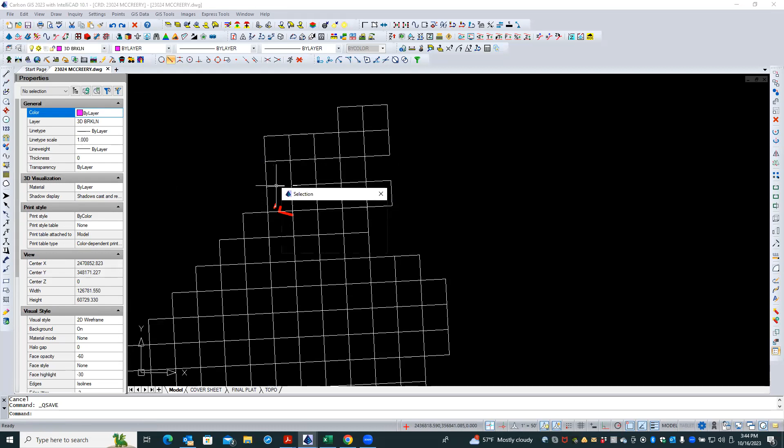Sixty-four 57. All right, so let me take a look at the data here. I'm going to import from the shape file. So see with that 6457, we'll just do the one and see where it goes. Okay, I get an idea now. No, that's going to be something way down here. So that's why I didn't think that was what we wanted before.

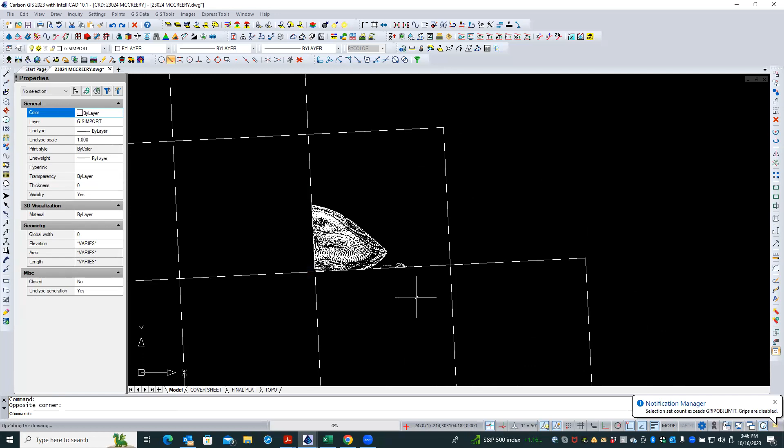So if we, yeah, crap. All right, so I gotta undo that. There we go. What is that? That is a piece of MText. So if I do this, 3D break lines, but not the lines, only the MText. Okay, now we're going to do this, select this.

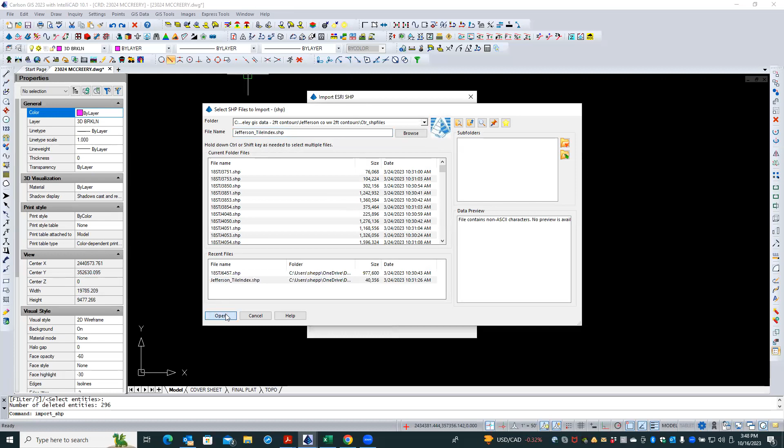All right, so now here's our preferred process. We go to our data, we insert the shape file, we select the file, which is our tile index, and we bring in the geometry with it, and we say, okay. Now, what we need to bring in, instead, we just told it to go for ID. So if I choose the USNG name, that's going to identify that. And so now that's going to come in here.

And so now if I look at this as my inspector, I'll just grab a few of these. We'll say okay. And now let's just look at that. And I see this one is, oh, come on. Okay. Selected those. Sorry. And the feature I needed to get. All right. So now bring that back and this over. Did that work? All right.

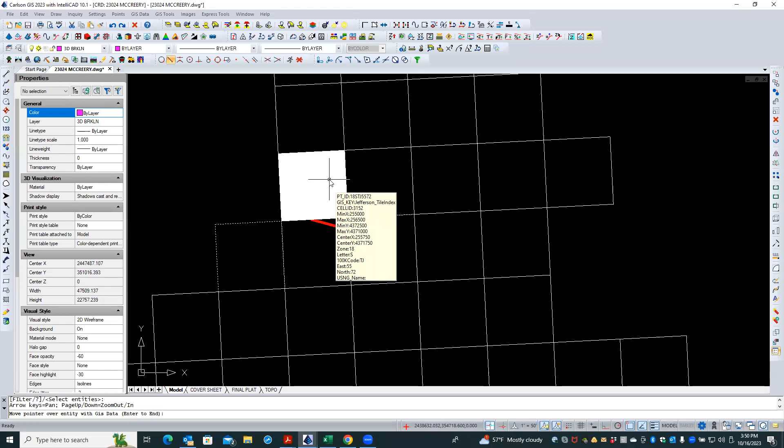So that's the east-west. That's the amount of north is 55, 56. No, that's the amount of east. 72, 72, that's the amount of north. PT must stand for something other than point. Well, no, it is the point ID. That's just the name of the field that is holding the value.

But when we brought the file in, like this, and we said okay, then what it is. So we have two things that we can claim. We can claim the point ID, or we can claim the elevation. These are the attributes that we're going to assign based on the data that comes in. So if I choose the point ID, it's going to look at, now here's all the data. And so I chose the USNG name and it went into my point ID. Okay, so that's how we ended up getting that.

So now we could even label these, label the GIS data inside closed polylines. There's our closed polylines, and we're going to label the point ID, no field name, just pick it, label, tag, and create table. We'll make it text height. We'll make it bigger so we can see it, and say draw.

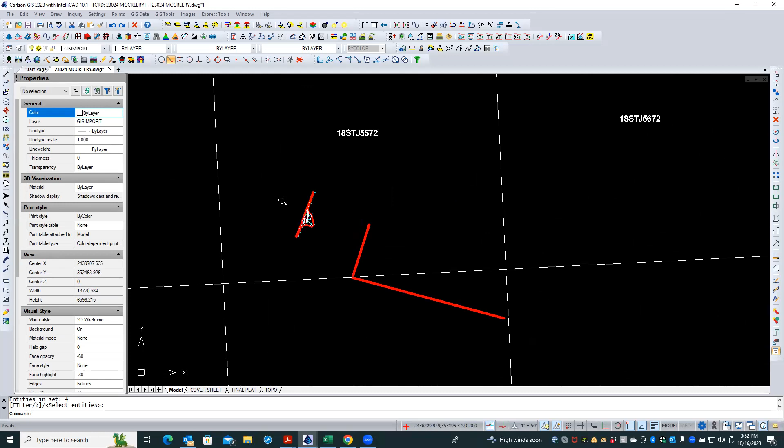So now there's your 5572, 5672, 5571, 5671. So let's compare these now with our 5572. That's the only ones we need to bring in. So let's go now to, let me change that GIS import. I'm going to change this to tiles. And we'll make the tiles yellow. That way we can control them a little better.

And now let's go ahead and I'll let you go to GIS data and we're going to bring in the contours. So import the GIS data. And it's an Esri shape file. And we're going to select the files. And this time you're looking for that 5572. Okay. Bring in more than that at one time? No, I would just look at this one for now. And we'll say, okay.

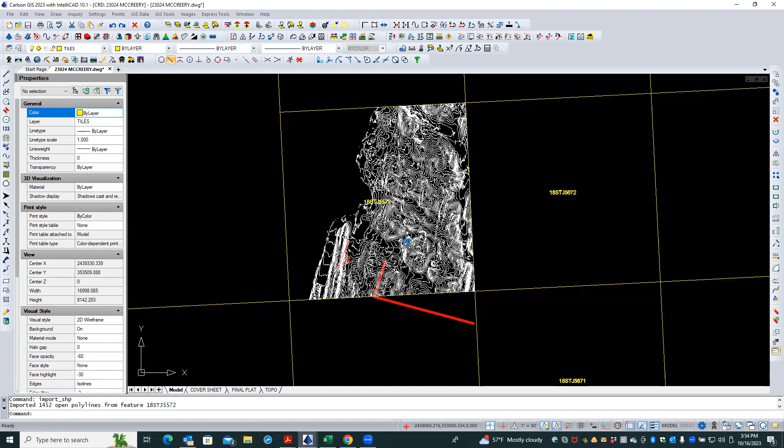And now what we want to assign is the elevation. So you're going to check that elevation box. And when you pull that down, you're going to choose from the available data points that the shapefile has, one of which is elevation, and that's what we want to use. So it's already set. And then we're just going to say import polylines. Okay. And there they are. And now let's take a look at what layer these come in on.

It's on GIS import again. So I'm going to go and call this GIS import layer again. We're going to call this one contours from WVGIS. And let's make them sort of darker gray, just to keep it from being quite so boring. And we'll take a look and see what we got.

All right, so right in here, this contour was at 414. And we have one that's hopefully also at 414. Sure enough, there it is. And you see how it follows that same general shape. Ours followed sort of along those lines. So I'm happy with that fit. This is the 420. We've got the 420, so all that looks pretty good. The contours cross the road fairly well.

They don't have this edge of pavement defined very nicely because you see that contour comes across and instead of pulling back right here, it sort of goes on across. So they basically show the road as being sloped from one edge to the other and you're showing it as being crowned. Do you remember when you were out there how it actually looked? It's not very crowned, but it's crowned. Yeah, it won't be very crowned. There's very little difference right in here, but here they're showing a little bit of a crown, and so they're back to being a crown shape in here.

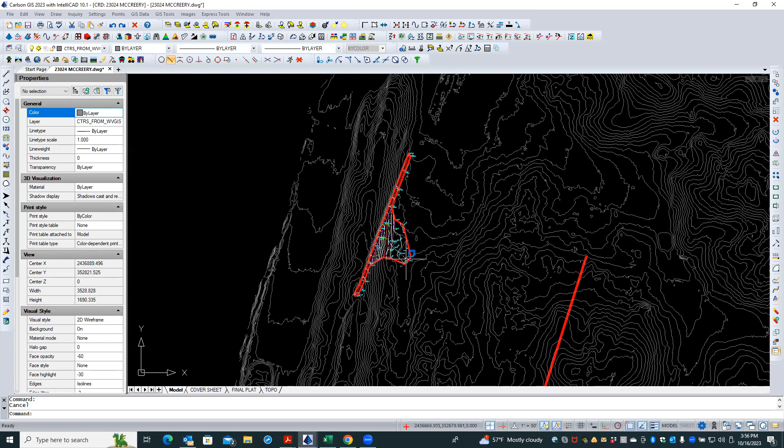But like down here in this part, they've got the crown completely missing right here and right here. You get the idea. You see what's going on, and yours actually reflects pretty much the same as theirs in there. So that's all pretty good fit. And so what we can do is we have our surface. We're going to make a surface out of their data, which again is going to be kind of rough because it's only going to be from the contours. Right. Then we're going to cookie cutter our data into their data and then deliver that result.

Okay. Now, the extent to which we need to do that is, so when you deliver this to the engineers, you're going to need to give them this stuff in here too, right?

Yeah, probably. Although I don't think they're going to go back that far. They're only supposed to go in for 100 feet or so. So really, they're not going to go in too much further than this. Probably, if I give them that, that ought to be enough, I would think. Okay. Yeah, and you know what?

Whereas you could give them all of this stuff down here as part of the surface, here's where I sort of draw the line at using that data. That's good for checking and it's good for preliminary work. But for you to deliver to them, hey, here is the topographic survey, that almost has a tacit implication that you surveyed that ground out there and you didn't. So they would have to make sure it's disclaimed and it says that the source of the topographic information is from the flight of such and such a date for the West Virginia GIS, blah, blah, blah.

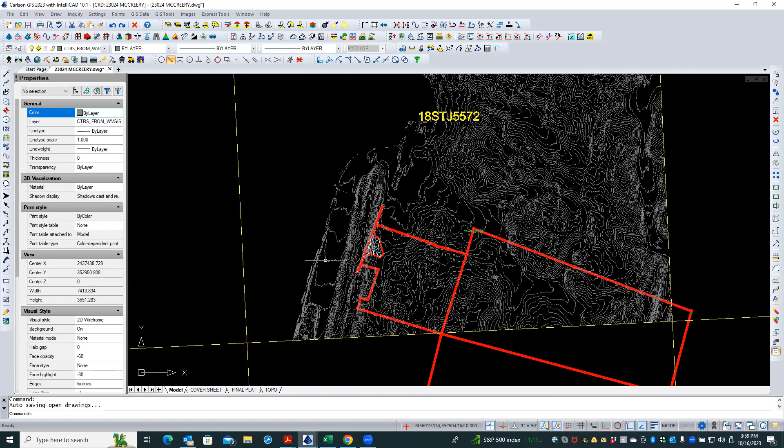Now, one thing we're going to do too, instead of going out here, what is this feature down here? Is it part of the floodplain? There's a stream over there. Yeah, that's what I was going to say. It's something broad and flat. I just wondered what was there. So let's draw. Also the county line, which is why you're not seeing anything across from it. Okay. There we go. All right, so I'm going to sit on this little boundary layer.

Now, what I want to do is I'm just going to draw arbitrarily here on that layer. And I'm going to turn off my snapping for the moment. And we're going to draw, just go from here. So right in here, and then I'm going to come up to here. And I'm going to come back to here, close.

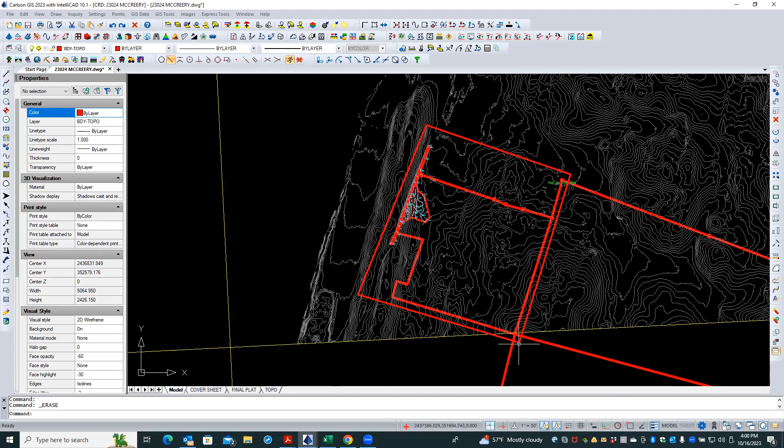All right, so I've done this, and now I'm going to offset that through, and I'm going to pick this line, and I'm going to say this out to there. Now, what I'm going to use this for is a boundary. So we're going to use that as our limits of creating a surface from those known contours, into which we're going to insert our surface that we've already made. Okay.

So let's isolate layers. I'm going to isolate these contours from WVGIS and our boundary. We have ours that we can leave on, but we're not going to use it for anything. And so we're going to build a surface out of this. Okay. So let's go to the triangulate and contour. We have to go back to survey, and then you're going to go to surface.

And by the way, what time do you need to leave? About 4:45. 4:45? Okay. All right. I just didn't want to push you in the name of pedagogy if you needed to get this done. Well, all right. I need to get it done, but remember, we're scheduled also for tomorrow morning. That's true. But I'm trying to balance, I want you to learn the stuff too, because I could do this for you in about 20 minutes and be done with everything, but I want you to be learning this so that you don't have to call me up every time you get this type of work to do. Well, this is the first one I've done in 3 years, and it may be the last. Oh, well. I don't get an offer to do it very often. All right. Well, all right.

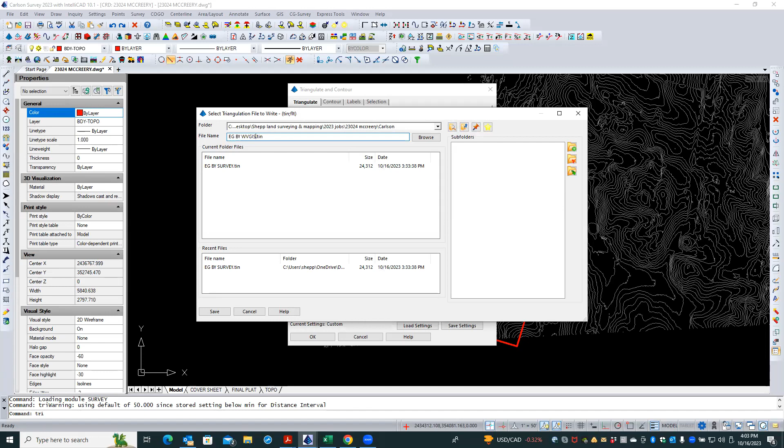Okay. So that's all we're doing is having a separate file. We're going to use the inclusion. We're going to now erase the previous contours. I'm going to turn that off because I don't want to run the risk of it getting rid of ours. Even though we've isolated the layers, it still will go through and do that if we're not careful. And we're going to ignore zeros.

And now this time, I'm going to uncheck this densify. That's not really going to help us a whole lot because these lines are pretty dense. But the big key is right here. This adjustments for source data of contours. I have source data that is nothing but contours. Terrible. That's all I can do with it, though.

I'm going to minimize my flat triangles. And that's really all I want to do. So it's going to try to keep any of these places where these contours double back on themselves, it's going to try to keep from allowing those triangles to form flatwise across those. It's still going to let some in, but we're going to just turn that one on.

And on the contour and label tab, now this one, I'm going to uncheck to draw the contours because they're already drawn. I don't really need to see them. I just need to make a surface from it and then see how it looks. So if I uncheck the draw contours, the label tab goes completely gray as you would expect because you're not drawing any. So now all I'm doing is creating a surface from the contour data.

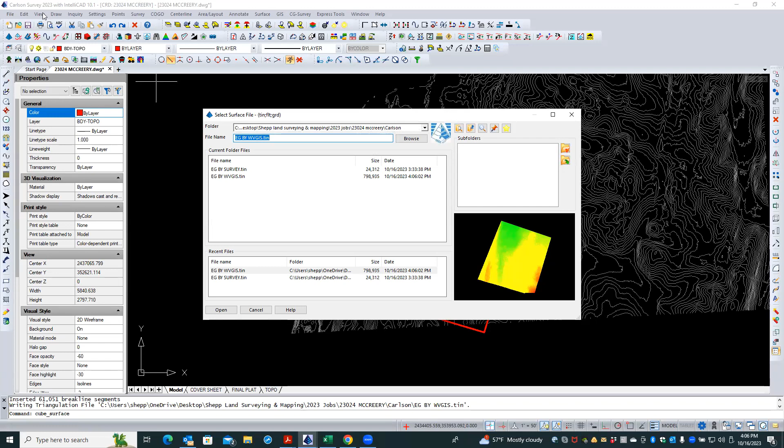Let's take a peek at the surface file viewer. So this is view, 3D viewer, but this time it's a surface file. And I'm going to take a look at that surface file and we're going to see it in all of its splendor. And let's turn on the contours at every 2 feet. And so that would look like what?

Now you see how these edges, there's some near vertical edges in there because, again, remember, the only thing we've got to go from are those drawn contours. Now here's a little goofy looking area in here, but that, you know, I'm pretty comfortable living with that.

I'm going to also now go to my model tab and I'm going to add some entities, and I'm just going to add these drawn contours that they had and overlay them on top of my generated contours. So you see my generated contours are yellow, the drawn contours are gray.

So even at that, we still didn't exactly match. Still got a little bit of interpolation that it's doing, like look right at this contour in here. So that would be a case where our contour is not incorrect, but it's just not as correct as it should be, because it does come up to that elevation and it does go way down here to this elevation, but it's doing this weird looking shape. It should be coming around separately. But again, and this one, who knows?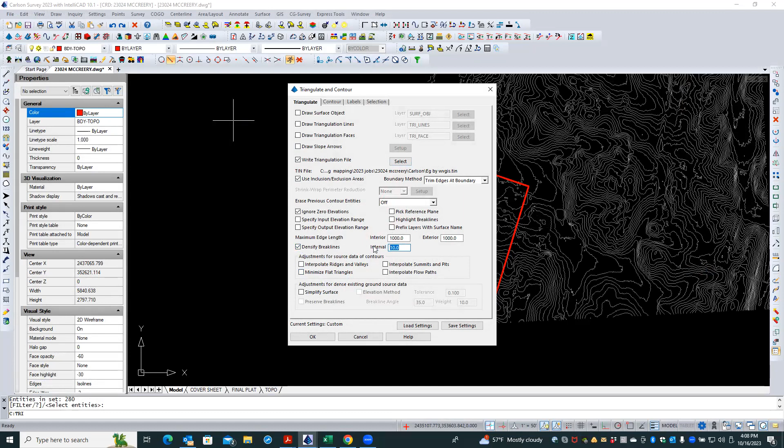So let's try one more thing. I'm just gonna do this instead of minimizing flat. I'm gonna put this back to say 25. I don't think I want to interpolate these ridges. Now let me see what that looks like for us.

I don't know with that. Oh, I do too. All right.

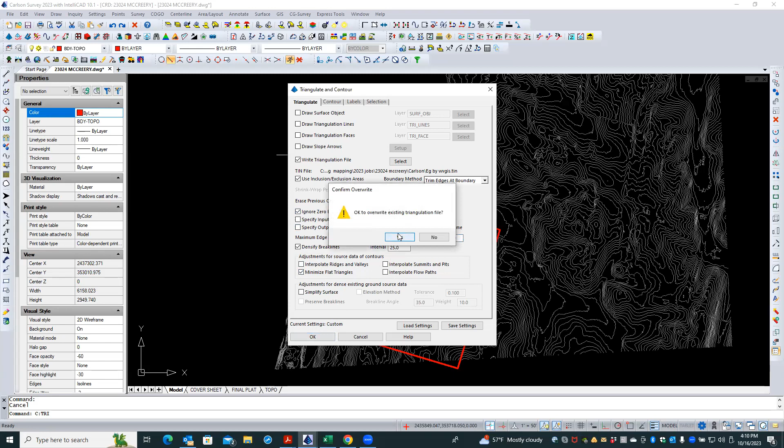So triangulate. So instead of interpolating these ridges and valleys, let's just do that. Ignore zero inclusion, exclusion. All right. That should be. Whoops. All right. Inclusion. Exclusion. Yeah, let's see. Okay, good. Now, if we look at that surface.

Yeah, we still are going to have these long, stupid looking shapy things in here. So that didn't fix a lot. If we did one more pass now, let me see what that does. I don't think that's going to be helpful.

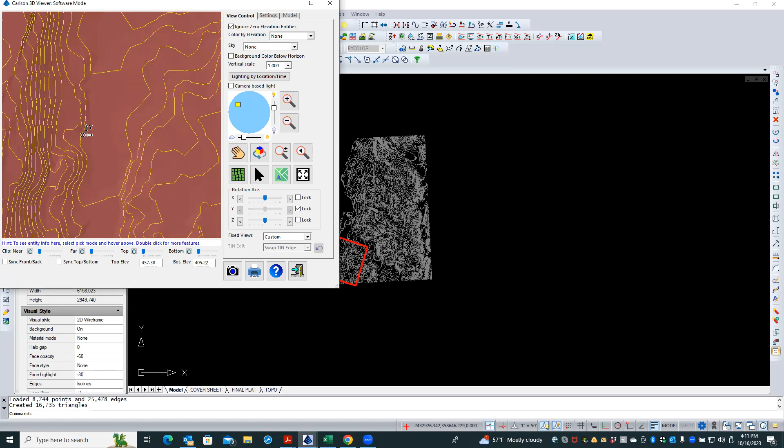May have didn't fix that, but it may have cleared up that in there. Let me take a quick peek at. Yeah, it didn't. It cut them off. So we do need to, once more into the breach, and this will do us. We do need to definitely minimize the flats.

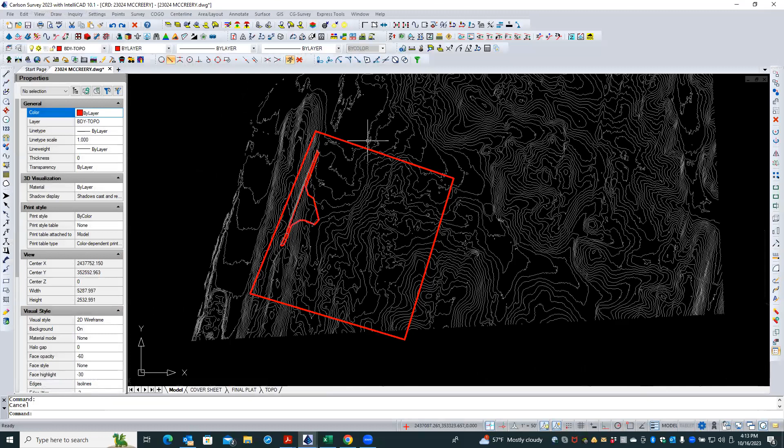And then we'll just live with those little areas. There's not much we can do with that unless we want to get into the trivialities. Now, so what we have next are these two areas.

We've got one surface here, and we've got a second surface that was our survey. And it looks like this as it overlies or underlies, whatever the condition may be. See, we're going to have better definition along the edge. You see all that jumbled looking mess? That's from theirs, whereas here we go.

When we turn this off, you see how ours is nice and sharply defined because we had a nice break line down there. Yeah. They didn't. Theirs is just this jumbled sort of random looking mess that sort of worked out here and there as it needed to. So because of that, we're going to slice our surface into their surface and come up with a composite surface and see how that applies.

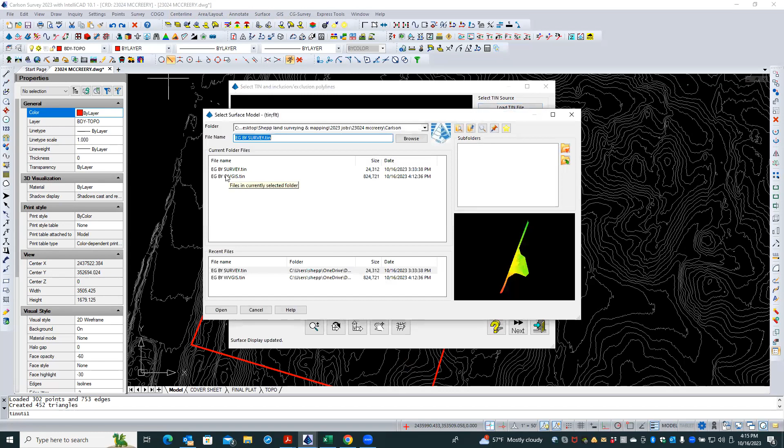So we'll go to our surface menu, and this time we're going to use the triangulation file utilities, which are right here. And we're going to load our TIN file. This is our base TIN file. So that's this overall one here. And you can see it, just as we were discussing it there. And we're going to now go to the next button at the bottom. And here, again, we can turn this back on and play around with it.

But within this, where our controls over here now are, in fact, let me make this not so full screen. All right, so within this now, we're going to merge our TIN. So we choose merge TIN. And the second TIN is going to be inside the current TIN, which has the outside boundary with a transition. And that's, I think, what we want. The second TIN is inside current, says outside with an adjusted elevation. I don't think so. Let's see.

The boundary is offset to create a zone where transition between; if boundary is missing, the outline of the second TIN is used. Okay, or this one is the boundary is used to add intersection points from both TINs. Elevation of second TIN is held at the boundary. I think maybe that's the one we want. Let me see what this one is. Cookie cutter style. The second TIN is taken as inside. The affected outer triangles are removed and the gap is retriangulated.

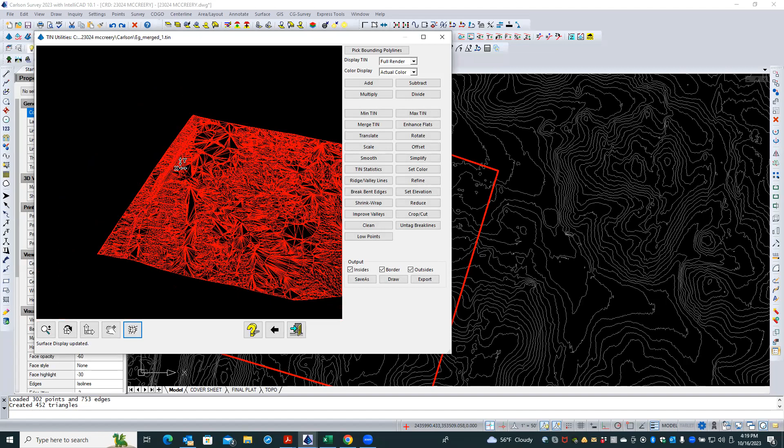See, that did. Yeah, there's your area. It should have the colors. I don't know why. Colors didn't work there, but anyway, we'll try this and see what happens here.

All right, we're going to go back one more time. We're going to merge. And this time we're going to remove from the current where it overlaps, combine and repair. Say okay, and I'm going to bring in the EG by survey. All right, we'll save that one as this one, but 3.

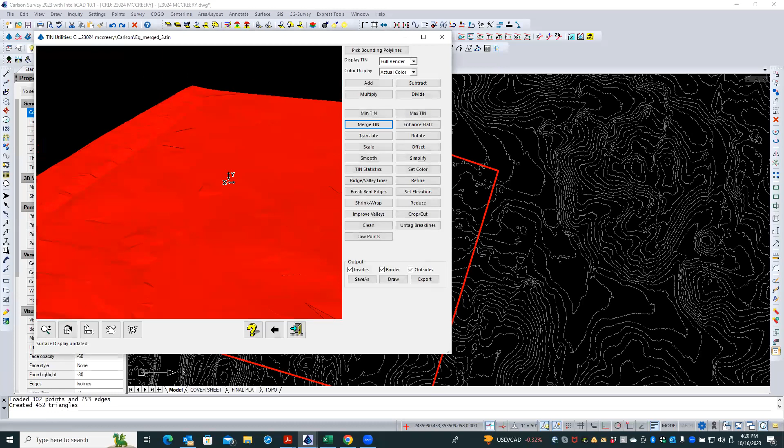I think I know what I may have done the last time. I'm going to go back one more time and remerge that second one, or the second time. I think I may have picked the wrong file. I think I may have missed that and got the other one. I don't know that. Nope. Apparently I did it the same way. There's something about that. I don't know what it is, but we've got it.

Okay, so I'm now going to exit. No need to save any of that. I have 3 different files. If I look at my merged in the first condition, let's look at our resulting contours. Look, okay, I'm a little concerned about this business up here. Not so terribly, but a little bit.

Let's see what else we've got. If we look at this second condition, I bet that's the top of a rock, and that doesn't look like it managed. So if I take that off, no, maybe it did. That looks like it merged it okay.

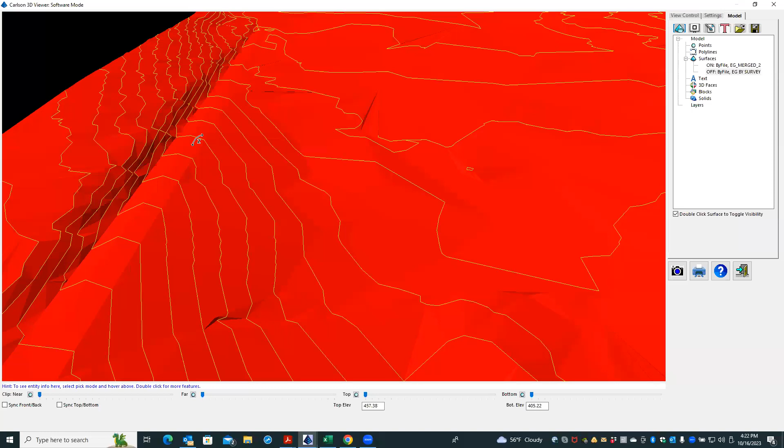Now, what did you notice? That little vertical edge back there is sort of gone. Yeah. Yeah, so that's, in fact, if I look at, oh, well, I don't have the boundaries shown up there. Now I've got a little bit of one in here, but of course, that's not going to be such an issue. All right, so I'm kind of liking that one for that particular case.

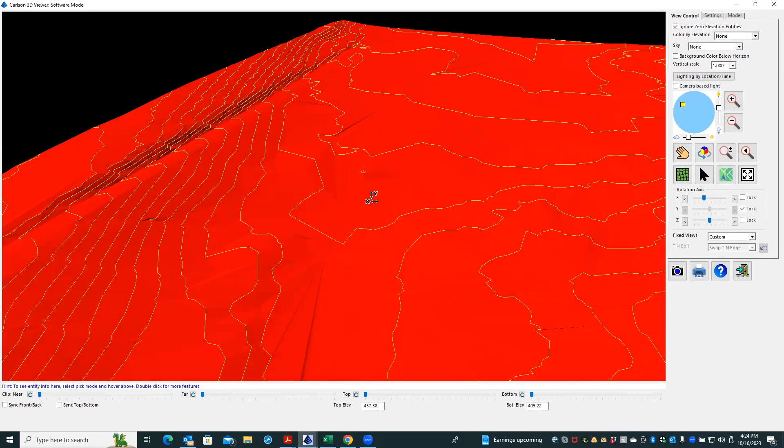Let's take one last look at number 3 here. And that's got a weird looking, it runs the contour all the way up here and around and back down and out. So that's also doing that. It's keeping that little vertical edge. I think this one is our better option all the way around, mostly anyway. Let's see. Up there's where that vertical edge wound up being. Now right in here.

See, that went from this point here, it shot all the way across to here to connect those up as triangle edges. Now, if I am able to do this, I don't know that I'm going to be able to. If I can add, say, from here to there, I fixed those lines. Get the same thing from here.

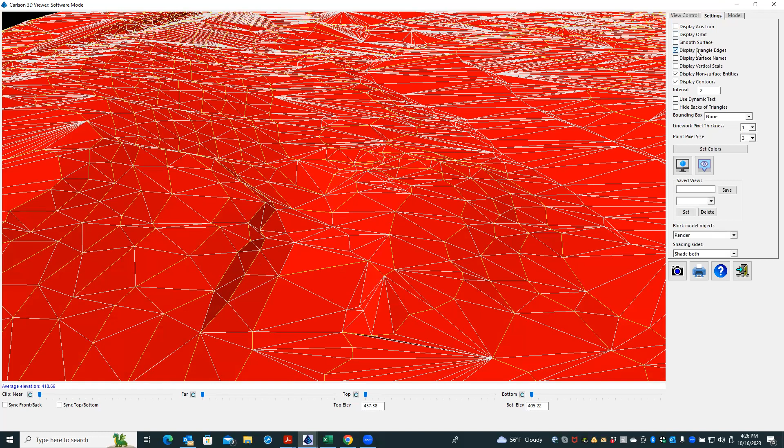Take care of a couple. Oh, right in there. Be happy with that. So this.

Here, here, and here. To say here.

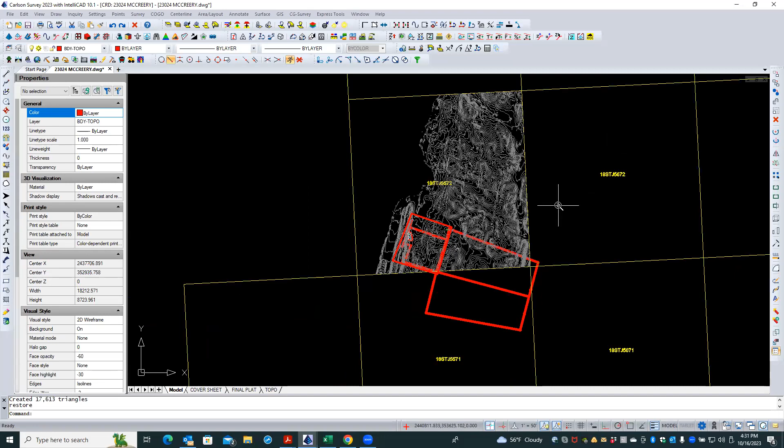And like I said, I think we've got a good enough interpretation. You've got some good clarity here that we've merged into this overall outside surface. We'll re-contour that one once we get that done. Of course, it'll only go out to the edges that we drew out to here. Right. And that'll be what you deliver to them, as well as you're going to deliver that LandXML file so they can use that file directly. Right. And that should do us.